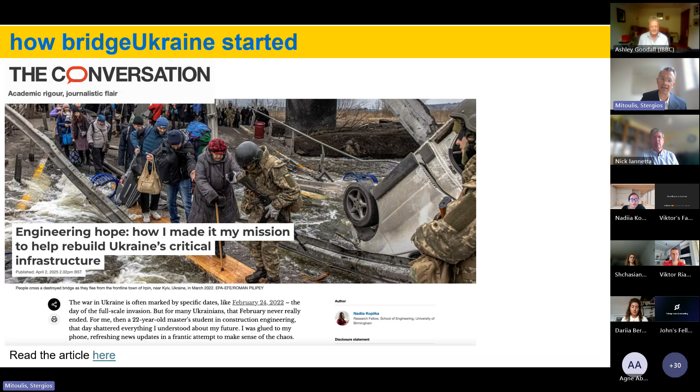Connecting from the previous slide and its context, Bridge Ukraine started with a clear aim to develop a framework for Ukraine's reconstruction. But as you will see, it quickly evolved into something much larger. Now, Bridge Ukraine is an alliance that goes well beyond the original goal and involves significant strands of both research, on the reconstruction, as well as education.

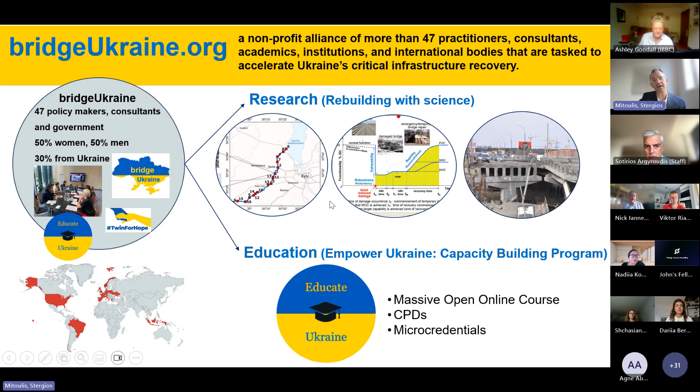It includes a strong capacity building program that we are now developing for Ukrainian professionals, engineers, and policymakers, and a broad network of international experts, as you see on the left-hand side. In short, Bridge Ukraine has become much bigger than the initial vision, branching out to multiple pathways of research and educational impact.

Now, in this slide, we highlight the educational strand of the Bridge Ukraine initiative, focusing on key performance indicators like our bilingual massive open online course. What is a massive open online course? It's an open resource that every Ukrainian, every engineer in Ukraine, will be able to reach, learn from, and also have the opportunity to get micro-credentials, which is something like micro-masters, from our program.

We are pleased to share that this effort is generously funded by a UK charity, though we cannot name them, but we are very grateful for their support. One thing that I believe is very important here is that over 90% of the funding that we received, around £625,000, is directly benefiting Ukrainians from the project. That means the project manager, the teaching fellows, and the lecturers are all Ukrainians.

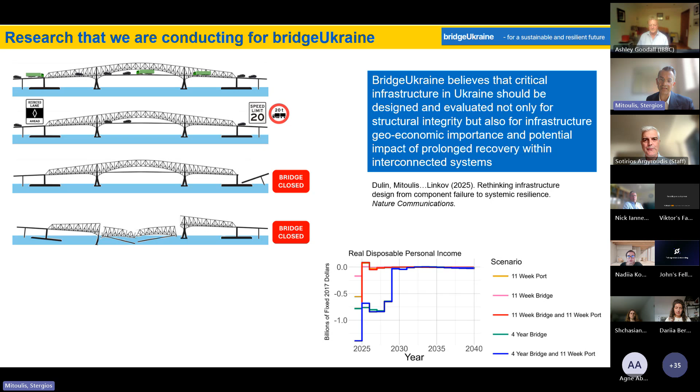The initial potential boost that you see as a positive output can be followed by a sudden decline. When a lot of funding and support is given to an area after something collapses, this might cause a very abrupt decline of the local economy. Our belief is that critical infrastructure must be evaluated not only for its structural integrity, but also for its broader geo-economic impact and ripple effects that might not appear until years later. This is something we really need to take into account in Ukraine's reconstruction.

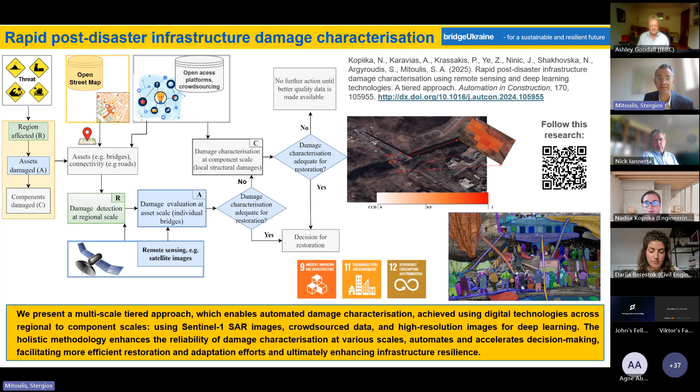This is another research led by Dr. Nadiia Kopiika, a researcher of BridgeUkraine. In simple terms, we use the power of satellite imagery to quickly understand damage to Ukraine's infrastructure. If we identify damage quickly, we can make smart and quick decisions to help Ukraine rebuild more resiliently. This research has been published in Automation in Construction, a high-impact journal, and it's openly available to Ukrainians and everyone who would like to read our article.

As you may understand, this is not research that I am doing alone. There is a group behind it, mainly Ukrainians doing this research, who are absolutely excellent, fantastic researchers to work with. Most of the colleagues you see here are Ukrainians, except for my colleague Sotirios Argyroudis, who is now professor at Brunel University of London.

After me covering the first part of infrastructure assessment and how education and research can help us accelerate it, Sotirios will navigate with you through what we call resilience evaluation, looking at recovery measures, how we reduce reconstruction times, and incorporating sustainability. So let me hand it over to Sotirios.

Thank you very much. I'll answer any potential questions later on. Thank you.

Thank you, Stergios. I will now introduce some of the excellent research carried out by our talented team over the past 3 years. Stergios has already shown some examples; I will show some more specific examples from this research. We are privileged to work with these researchers and to collaborate with Ukrainian universities. These people are really passionate about Ukraine's reconstruction.

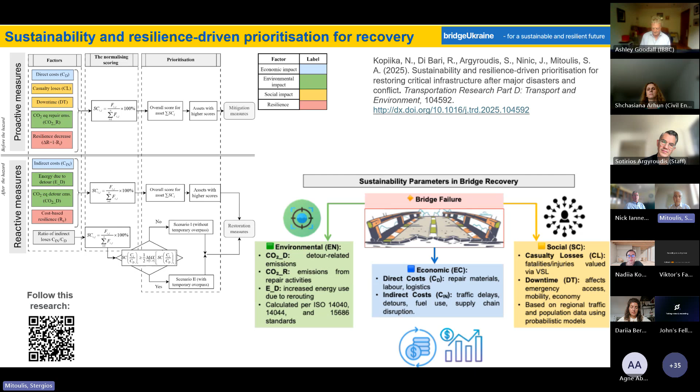As proof of that, Dr. Nadiia Kopiika developed the first framework in the international literature which introduces a systematic rating system for post-conflict reconstruction. We can see the framework in this slide. Traditionally, recovery strategies have concentrated on direct repair costs and structural integrity, often neglecting the wider socioeconomic, environmental, and resilience dimensions of infrastructure recovery. In this framework, we address this gap by explicitly integrating both proactive and reactive measures, but also temporary measures, which are not always considered in conventional conflict resilience models. By combining economic, social, environmental, and resilience metrics into a unified prioritization system, we can see here examples of these metrics, and the system enables evaluation of multiple recovery pathways.

This can be either immediate temporary solutions or long-term sustainable reconstruction. In doing so, the framework provides policymakers and engineers with holistic, science-based tools to allocate resources strategically and balance short-term needs with long-term resilience. The framework is openly available in this paper at Transportation Research Part D.

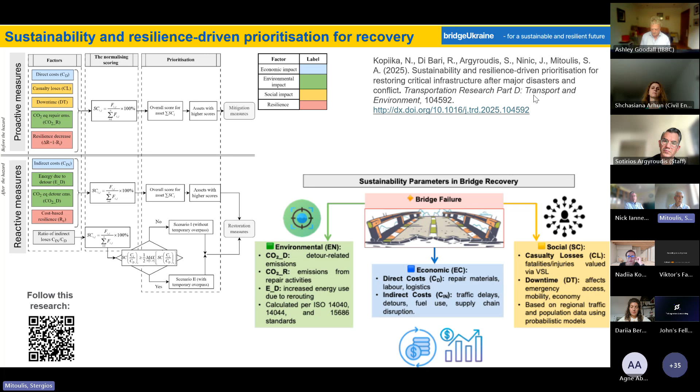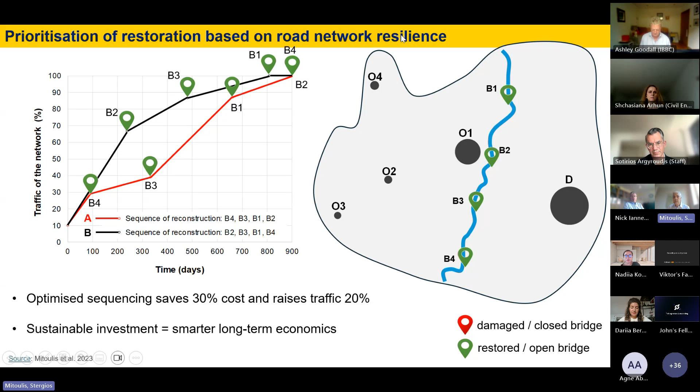So we compare different sequences of reconstruction. In this graph, the red path is the historic sequence: first Bridge 4, then B3, B1, and B2, while the black restoration sequence follows a different order of reconstruction. By comparing these pathways, we see that following the optimized black sequence results in increased traffic capacity by more than 20% and a reduction of reconstruction cost by 30%, offering substantial value under budget constraints.

This framework is not just theoretical. It has already been applied in a real case study west of Kiev, as we see in this map, prioritizing the restoration of 4 damaged bridges along the Irpin River. These results can guide the Ministry of Communities and Territories in rebuilding damaged infrastructure, as well as insurance and investors.

For optimizing and increasing traffic capacity, reducing disruption, and increasing certainty in Ukraine's recovery, simply by reordering reconstruction priorities. In the next 3 slides, I will briefly highlight a few more examples of research topics from our group without going into detail. We don't have much time, but this presentation is already available to you, with links to the open access publications from this research.

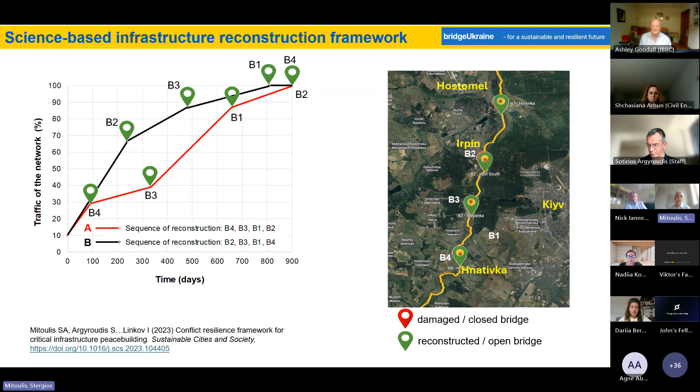This slide is drawn from BridgeUkraine's contribution to the United Nations Development Programme and the Group of 20 global flagship report on disaster and climate resilient infrastructure, where we argue for more sustainable reconstruction of Ukrainian infrastructure. We demonstrate the finance needs for this renovation and reconstruction. This exercise was performed for all road and railway bridges in Ukraine, comparing conventional and sustainable adaptation strategies, with results presented in terms of investments as a function of the country's GDP.

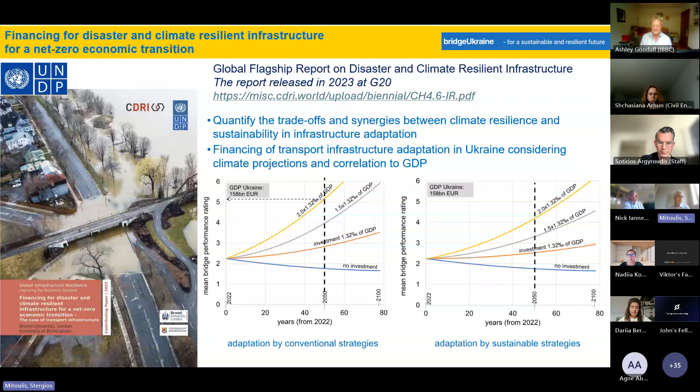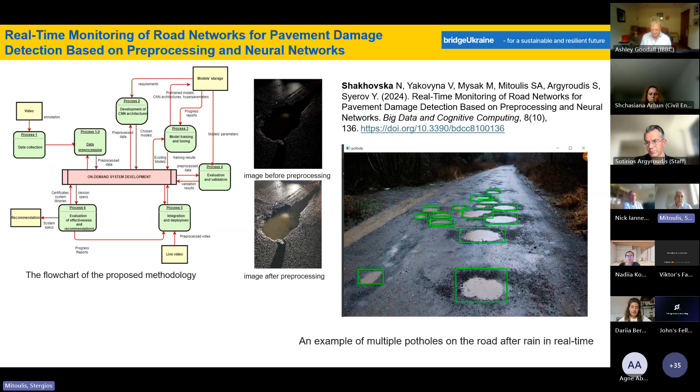Another paper presents recent work in collaboration with Professor Natalia Shakhovska, Vice Chancellor of Lviv Polytechnic. In this research, we developed a novel model for recognizing road surface damage, such as potholes or cracks, based on images and videos using convolutional neural networks. This facilitates rapid damage recognition of road networks.

And one more example: research includes experiments in wind tunnel facilities conducted by Associate Professor Kristina Myroniuk. This research offers energy-efficient renovation solutions for modular housing in Ukraine using natural ventilation.

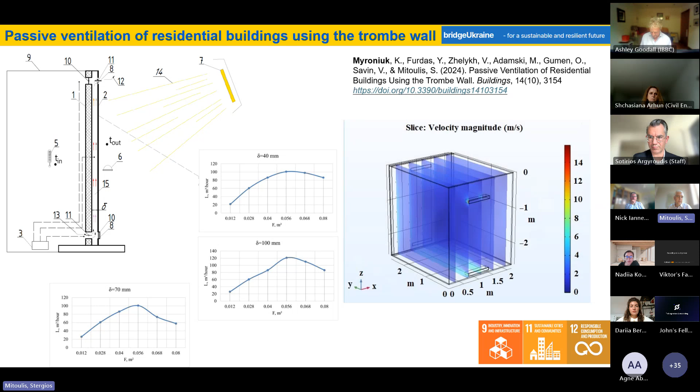I will finish this presentation with some key points and our vision as BridgeUkraine. What we need is to develop advanced benchmarks for reconstruction prioritization, using real use cases from Ukraine for optimizing decisions under financial resilience and sustainability constraints.

You are all welcome to contact us if you have use cases that we can include in our research, and also to contact us if you want to develop with us CPD and taught modules as part of our Empower Ukraine educational program that Sotirios has previously presented.

We are also co-creating a practical science-based framework for resilient, sustainable and equitable reconstruction in Ukraine through participatory work with academics, ministries, donors, and we would like to extend this effort with your contribution and help.

Finally, BridgeUkraine supports ministries and policymakers in Ukraine and the UK with evidence-based guidance that aligns with EU standards and donor requirements. We would like to engage more with insurance, investors and industry partners to translate our resilience research into financial and operational strategies that reduce risk and accelerate assistance and resilience.

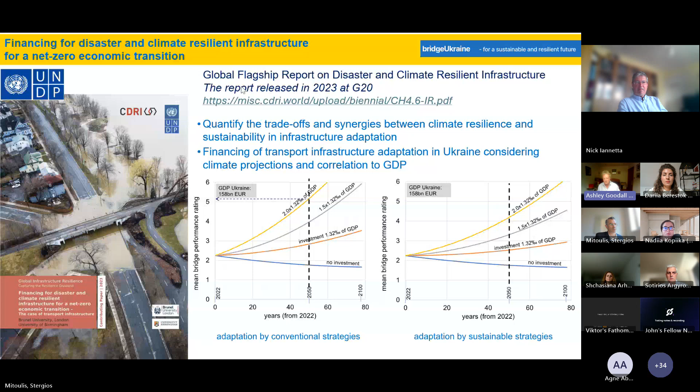And I'd like to come to Steve Rowan now, who's Managing Director of Earth and Marine Environmental Consultants. This is another part of the picture in the sense that what Steve does is assess the probability of return on investment, so when you go to the banks and get the funding, it'll be clear that the projects Stergios and Sotirios are putting together are likely to come about.

So, Steve, are you here? Can we hear from you? Yes, I am here. Good afternoon, everybody. Hope you can all hear me.

Yeah, I do have a few slides that I've prepared that might just help guide the discussion. Am I able to share my screen? Yeah, should be. Just give me one second.